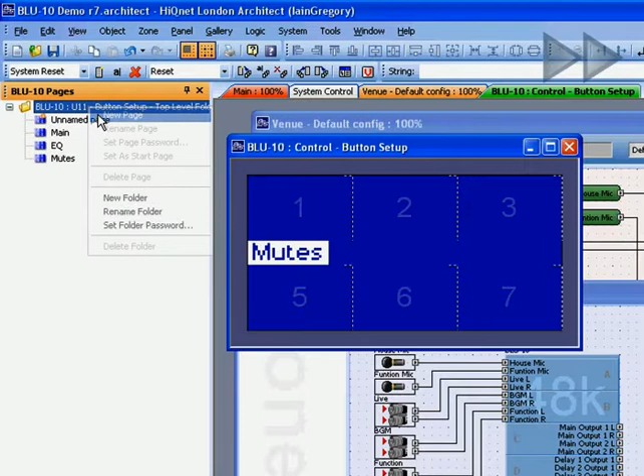This process is repeated until all pages required are created. Additional pages can be created later if necessary. To rename a page, right-click on the page in BLU 10 Pages and choose Rename Page.

To implement a single button on the BLU 10, scroll down to Use as Single Button and change the value to 1. To implement touchscreen navigation, left-click to choose a page and drag and drop the destination page from the tree to the button position.

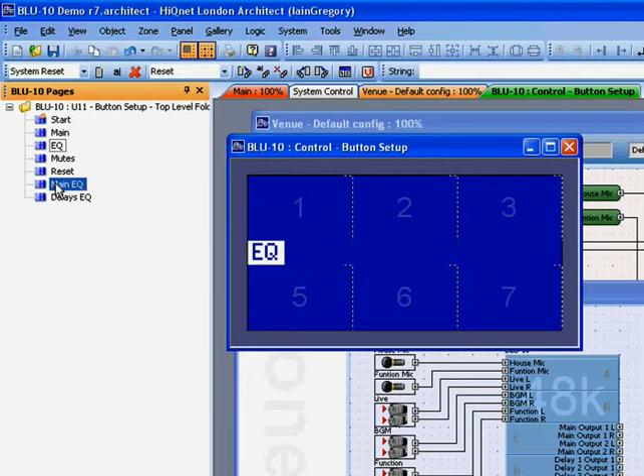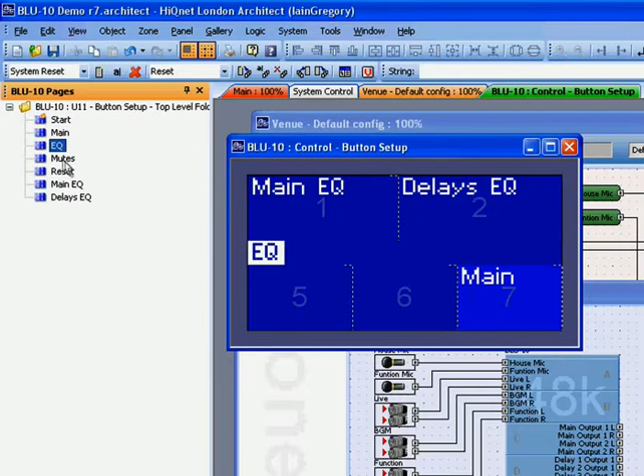The process of dragging destination pages to button positions is repeated until all navigation is configured. Navigation can also be modified later if necessary. Button positions can be resized by dragging the partitions. Back buttons can be added by dragging a destination page from the tree to a consistent button position. This gives navigation hierarchy and allows BLU 10 parameters to be organized logically.

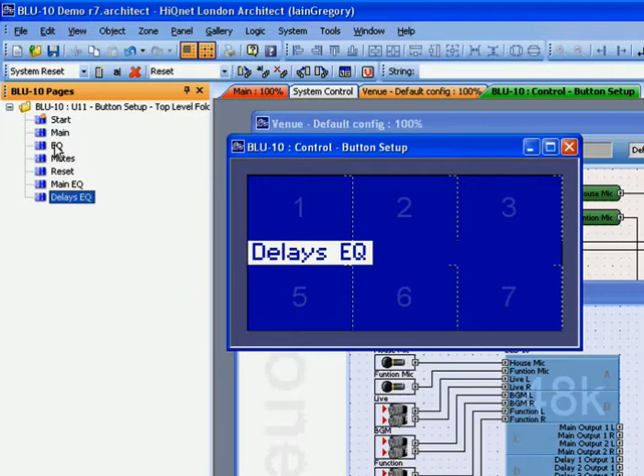The text which appears on buttons on the BLU 10 can be customized. Text is edited in the properties of the button position. This process is repeated until all button positions are set up to show the desired text. The back buttons created before are labelled in exactly the same way. Note how consistent text can be used irrespective of the destination page. This simplifies backward navigation.

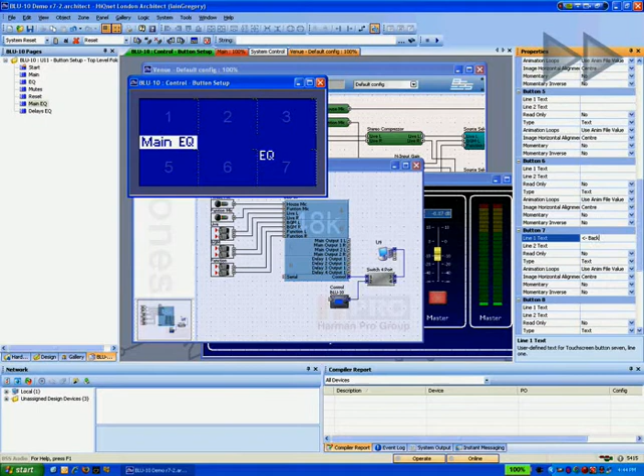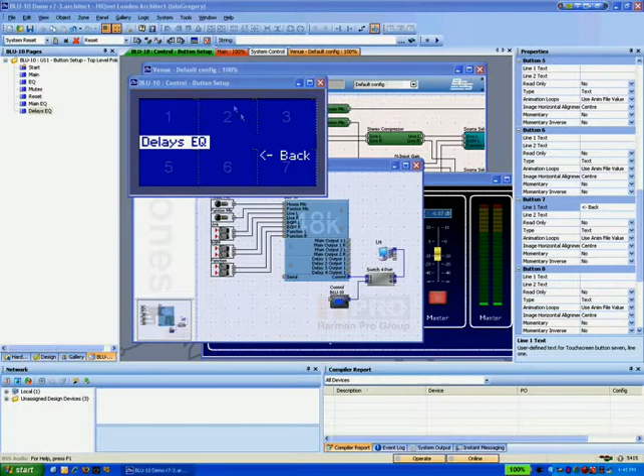The BLU 10 simulation mode allows a programmer to audition the behavior of a programmed BLU 10. To run the BLU 10 simulation, right-click on the button setup window and choose Run BLU 10 Simulation. The BLU 10 now simulates the operation of a physical device. The navigation functionality, including the operation of the back buttons created earlier, can be checked.

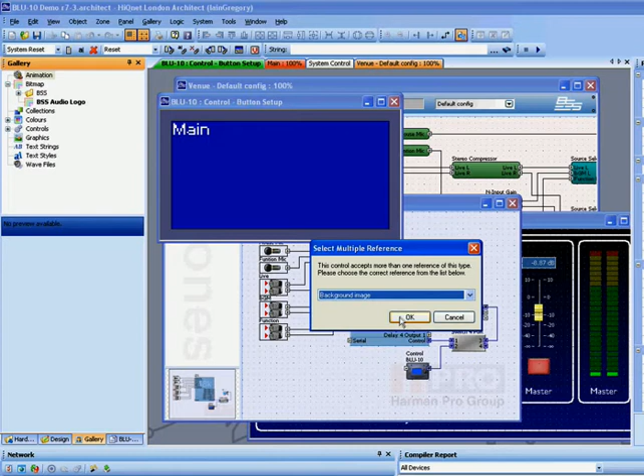Custom graphics such as company logos can be displayed on the BLU pages. Graphics to be added to a BLU must first be added to the HiQnet London Architect gallery. The bitmap is dragged from the gallery onto the BLU. At this point, you must choose whether it is a button image or a background image. The simulation mode can be used to see how the graphics will look on the physical device.

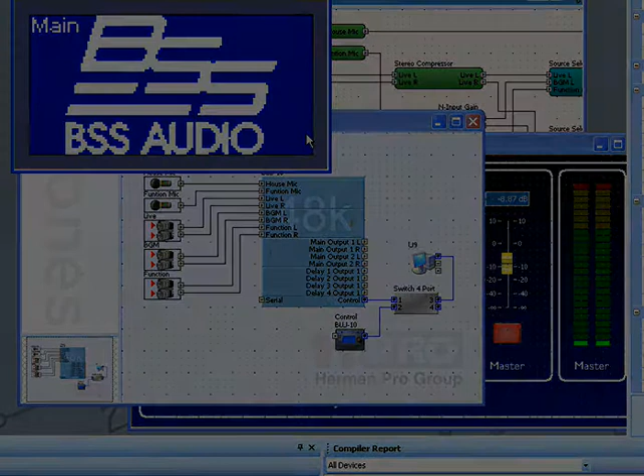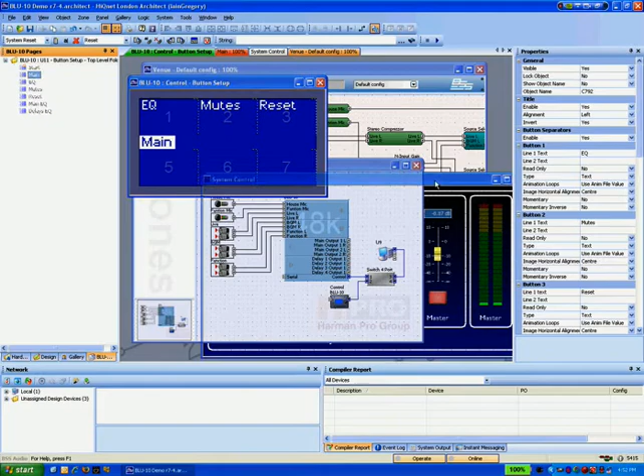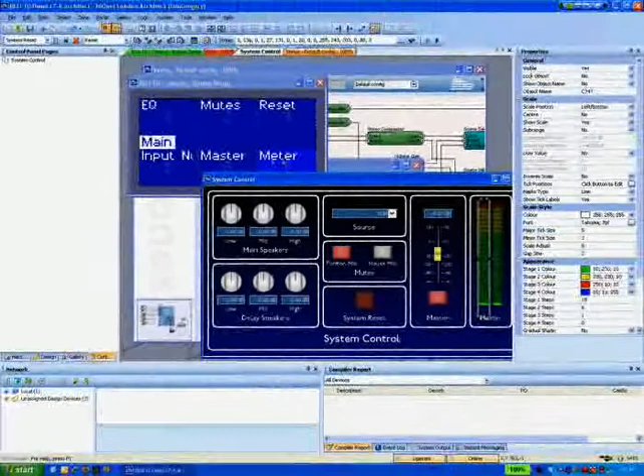So far, we've only set up navigation. We now need to add the things we wish to control from the BLU. Parameters are assigned to button positions by dragging and dropping from default or custom control panels. Here, we're assigning a source, volume, and meter to the main BLU page. Again, the text can be customized in the button properties.

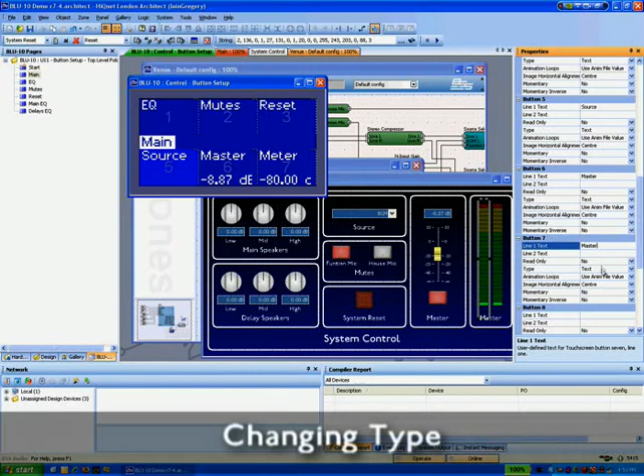The meter can be adjusted to show a bar meter rather than the actual value. This is done by selecting meter from type in the button properties. Sources can now be selected, and the master volume can now be adjusted. The master program level is now displayed on the BLU.

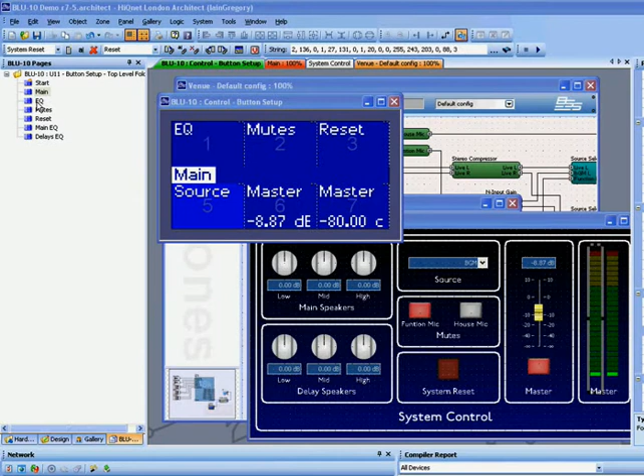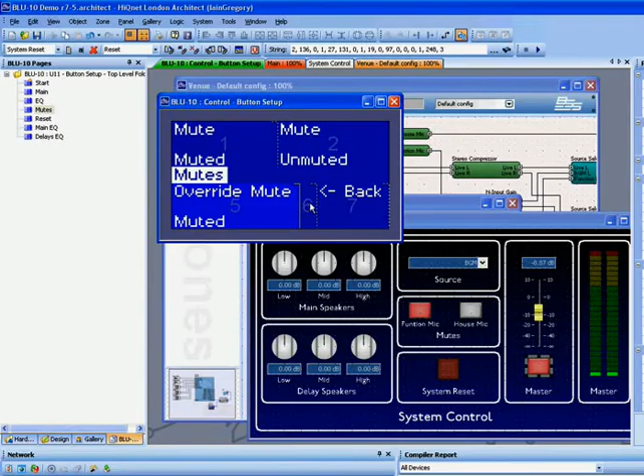The remaining parameters are assigned by selecting the BLU page and dragging and dropping the parameters from the custom control panel to the button positions. Again, the button positions can be resized by dragging the partitions. The button text is edited in the same way as before.

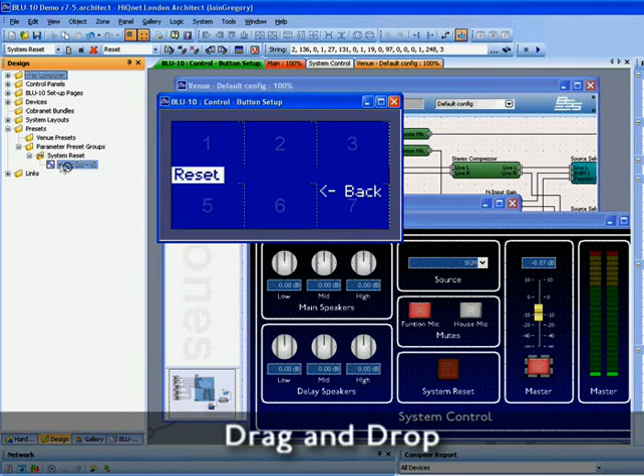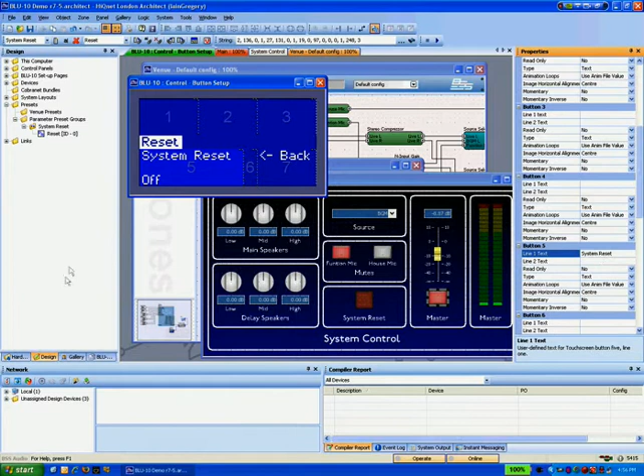Presets can be added to the BLU by dragging and dropping from the design tree to the BLU button positions. The button size and text are adjusted in the same way as before. The ability to drag and drop parameters from default or custom control panels makes configuring the BLU 10 very quick and very easy.

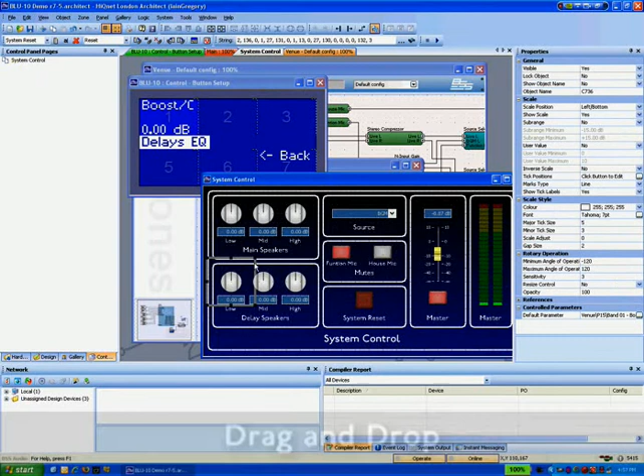More parameters are assigned, and the accompanying button text is customized in the same way as before. Let's review the programming so far. Our start screen now displays custom graphics. Clicking through reveals the main control page. This contains page links to EQ subpages, the mutes page, a reset page, and the parameters we've just assigned. Navigating through the menu structure allows us to check the operation of the BLU 10.

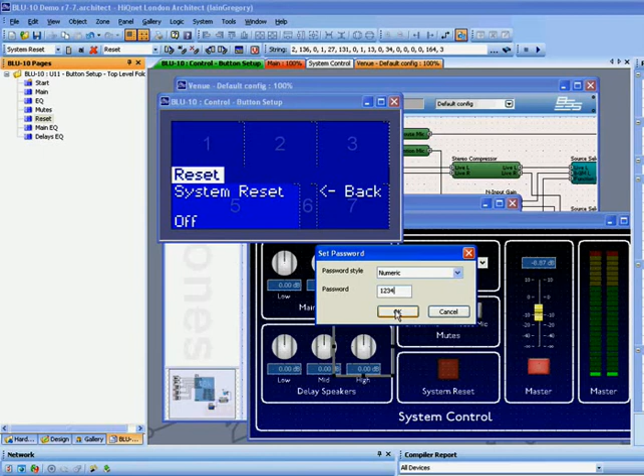We need to ensure that unauthorized users can't reset the system. We need to add security. To set a password for a page, right-click on the page and choose Set Page Password. Choose from alphanumeric or numeric. Enter your password. Use the simulation mode to check the security implementation.

Entering the wrong password disallows the user access to those password-protected areas. Entering the correct password allows the user access to the password-protected areas to make more advanced changes to the system. The Soundweb London BLU 10. Simple to program and simple to use.